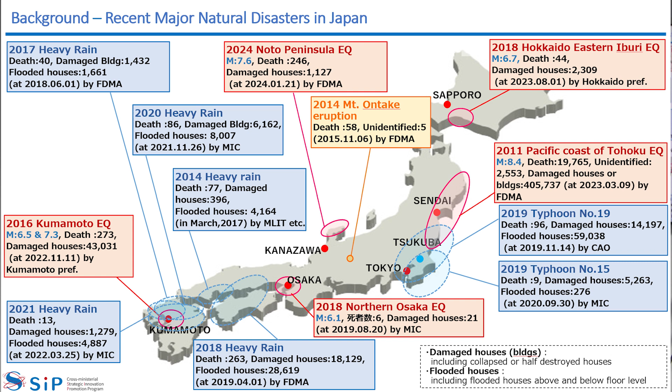As the Japanese ambassador pointed out, unfortunately we got a pretty strong earthquake in Noto Peninsula in 2024. This year, on New Year's Day, the earthquake happened, right there facing the Japan Sea. Earthquakes never care what day they come.

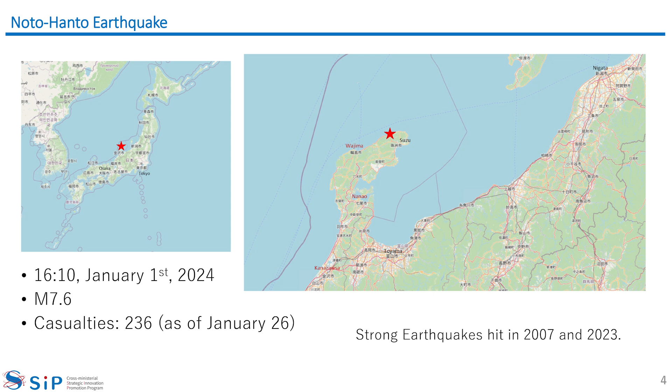The magnitude was, as the Ambassador said, 7.6. More than 200 people were killed due to the earthquake. Fortunately, nobody was killed due to tsunami. Tsunami hit the area, but people evacuated.

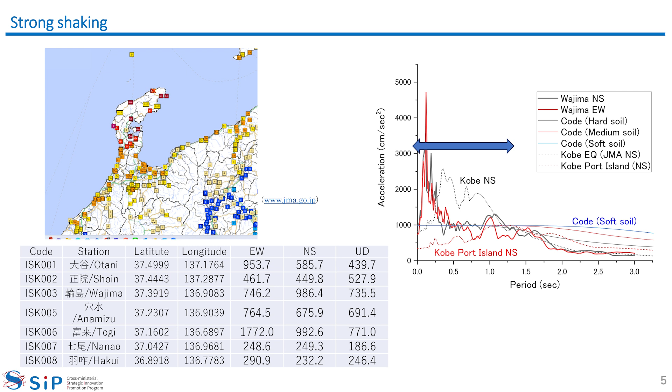Now we have a lot of sensors on the ground to measure the seismic intensity. The calculated seismic intensity hit the highest level according to the Japanese scale, which was a 7, in some cities.

The geographic characteristic is quite unique in this prefecture. You can see a very narrow peninsula. When the earthquake hit this area, we didn't have enough roads, and they were seriously damaged. We lost the way to get to the affected area.

That was quite strongly related to disaster management and also infrastructure management, how to maintain the roads to prevent this kind of catastrophic event. Many small towns were isolated because they lost the way to get out of the area.

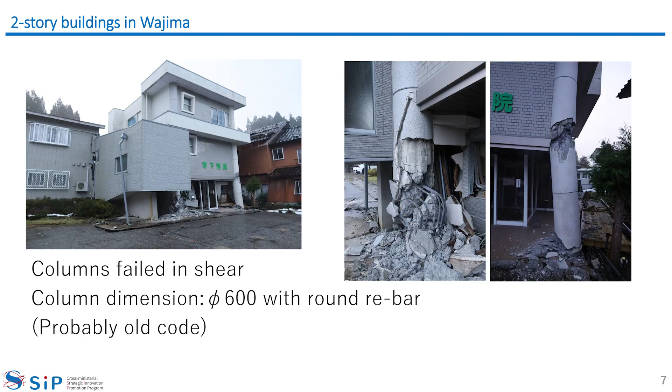For example, this one was a hospital, but unfortunately severely damaged. It looks very old because this building is using round bar, quite smooth round bar, which is not common right now. That means this building was designed according to the previous building code. According to Japanese law, the owner is recommended to evaluate the seismic capacity of a building designed under the previous code and strengthen it if needed.

But unfortunately this building was not retrofitted, that's why it collapsed. This photo is quite shocking, but this building overturned totally. Sometimes during other earthquakes, some buildings overturn like this. This is not the first case.

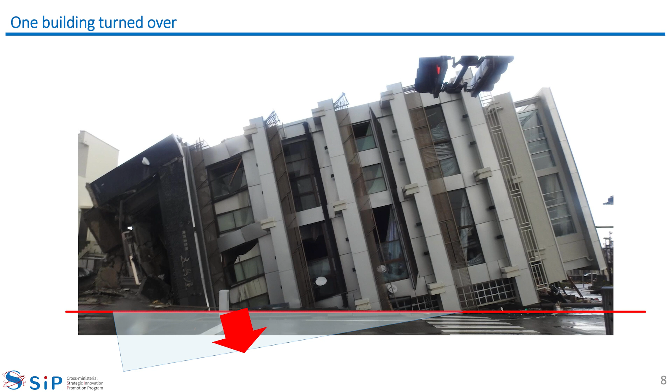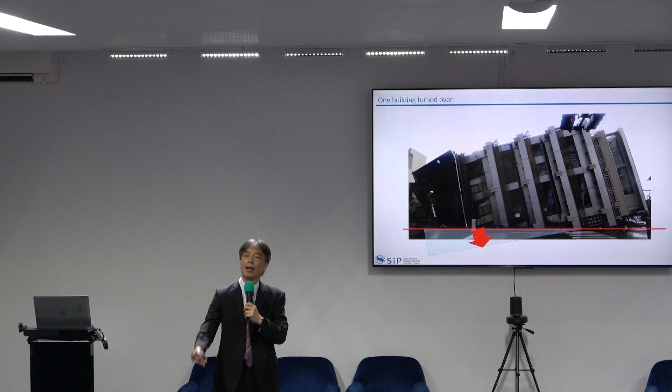But what was a first case was a 3-story timber house right here - you cannot see it, but a 3-story timber house was there. On New Year's Day in Japan, families gather to celebrate, and unfortunately that family was inside the house, which was totally crushed. The husband lost his wife and daughter there. So still in Japan, some people were killed due to the collapse of buildings.

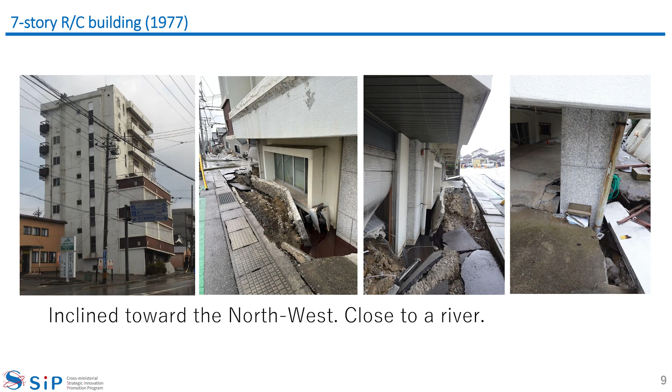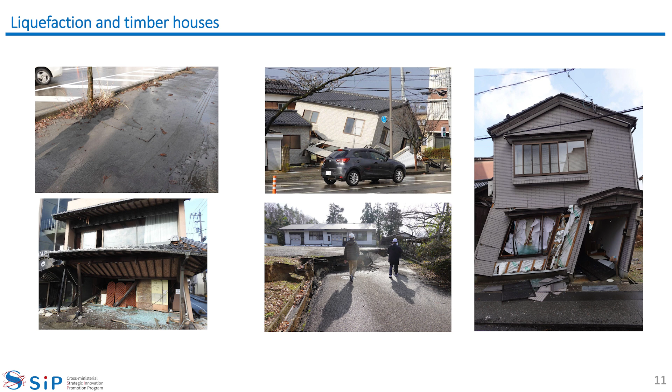And houses collapsed a lot. So we are still facing the same problem - once an earthquake hits Japan, still some people are killed due to the collapse of buildings, like this.

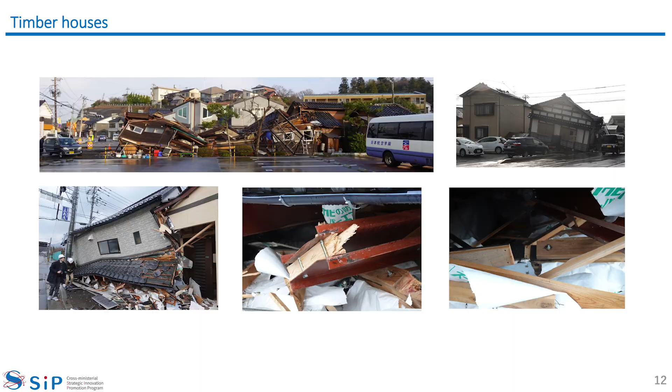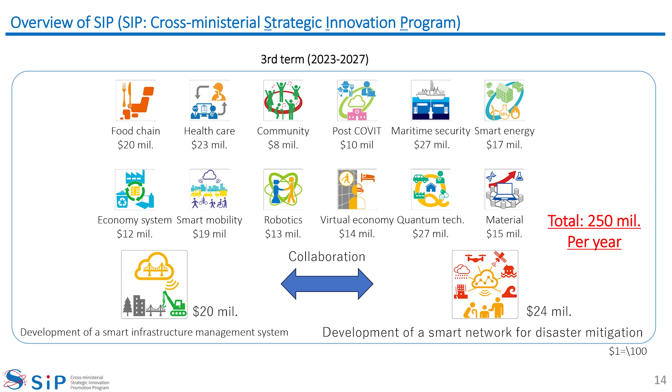Just from last year, the third term of SIP got started. Again, the Cabinet Office selected 14 subjects this time. One of them is disaster mitigation - development of a smart network for disaster mitigation is the current title. The budget size is huge, about $24 million per year for 5 years.

Today we have Professor Kisana from Tohoku University and Professor Akiyama from Waseda University, the leading universities in Japan. They are working on the development of a smart infrastructure management system. These two subjects were selected by the Cabinet Office and started last year for 5 years.

We are, of course, collaborating - like in Romania, where you collaborate between the Ministry of Construction and the Ministry of Transportation to promote seismic evaluation and retrofitting, and also to promote bridge management. As I said, this SIP project should be a multi-ministerial project.

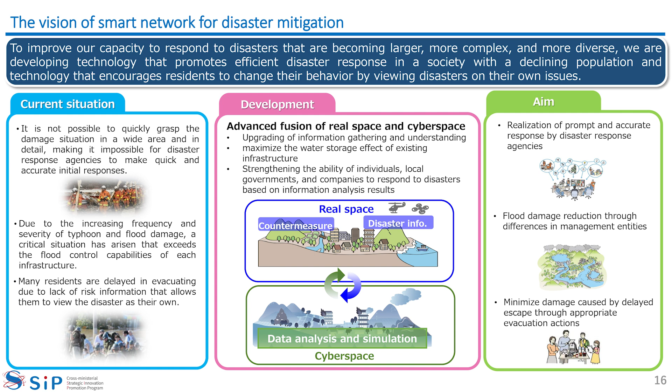Earthquake happened, then we can see the TV program, which shows overturned building. Then we recognize it's a serious situation. But it's quite difficult, where the affected, collapsed buildings were in the affected area. We cannot specify the locations of the damaged buildings, damaged people, and damaged roads and so on. But it's quite important. That's the first step to countermeasure the disasters.

Then, unfortunately, the frequency of the earthquake, typhoon, flood is increasing, most probably because of global warming, especially for the flood and the typhoon. It happened once per 5 or 6 years before, but right now, almost every year or every other year, a really strong typhoon hits Japan. Unfortunately, it should be in August or September, but right yesterday, the first typhoon was born, then heading to Japan right now. The typhoon will get to Japan the day when I will fly back to Japan. I'm pretty concerned about the situation of the typhoon right now.

On the other hand, people get used to the information about the disasters. Like me, today, typhoon is coming. Or earthquake happened and sometimes a tsunami warning is announced, and some people go to the coast side to see the tsunami. It's quite dangerous. It's quite difficult for the current central government to make the people evacuate. That's a pretty big concern right now.

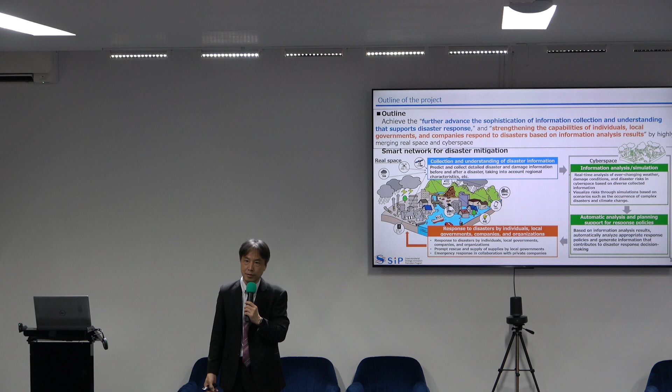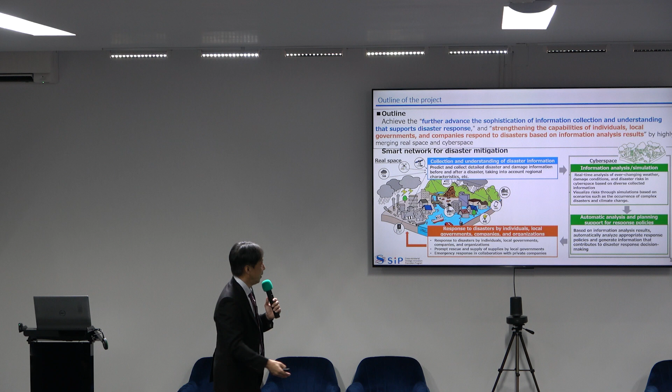But if we just give the raw data of the analysis to the decision makers, they never care. That kind of raw data cannot support the decision makers. We need to translate the raw data from the analysis for the decision makers, to support them. Then it comes back to the real world to support and take action against the disaster. The typhoon is moving second by second, and the earthquake aftershocks will come. As such, the disaster can change time by time, second by second. So this kind of cycle goes around during the very serious disaster period.

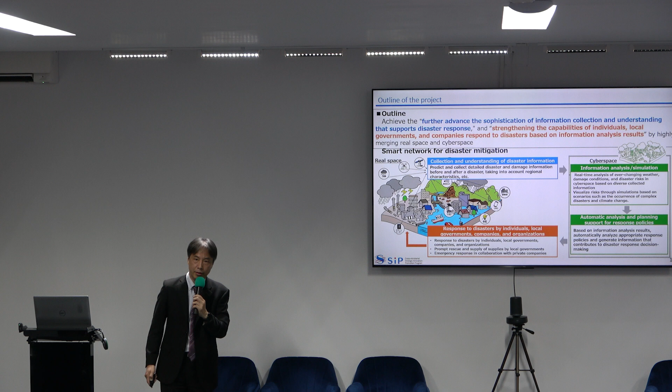This is the structure of our project. I'm sorry the letters are too small, but I hope you can have the handout of my presentation. We have 5 subtopics, subgroups from A to E.

A is a detection team. They are going to use satellite, drone, IoT sensors installed in, let's say, the microwave, light, air conditioning system. You have sensors in your home everywhere. We're going to connect such IoT sensors to the system to detect the situation.

That's subgroup A. Subgroup B is one of the very, very challenging groups, to change people's mind to evacuate. That's not only a technical issue, but also somehow a social issue. How to change people's mind to make them evacuate. That's group B.

Group C is also another quite challenging topic, to share the data among the agencies, such as the self-defense agency. It's quite similar to military, but our government never calls it military, so it's a self-defense agency, and police department, firefighter department, ambulance team, their immediate response team. Historically, it's not easy to share the information among such very important agencies. They tended to hide the information. But we are going to develop some special tools and devices and agreements among the agencies to achieve immediate data sharing.

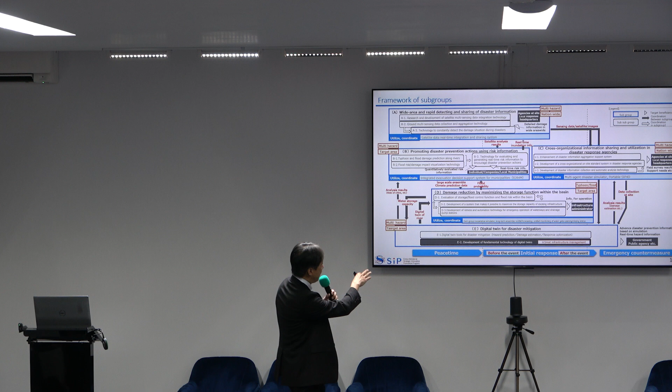This kind of digital twin, if we obtain it, can be used not only for disaster mitigation and disaster management, but also infrastructure management for daily use.

Because of that, the SIP program for disaster management and Professor Hisada's group's SIP program for infrastructure management are collaborating on this issue. So the basic digital twin will be constructed by the SIP infrastructure management team. They will develop it, and then we, the disaster management team, will develop a tool on this fundamental digital twin system.

Because the project is huge, many professors and former central officers are involved in the project. The supporting agency is NIED, National Institute for Earth Science and Disaster Mitigation. Dr. Suzuki is the program manager, and some professors are involved in managing the project for each subgroup. On the right side are the actual researchers conducting the research.

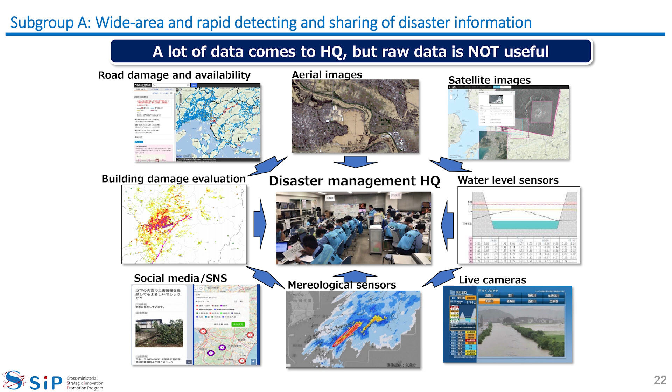This one is subgroup A. They are going to use satellite imagery and IoT sensors in buildings and rivers, and drones.

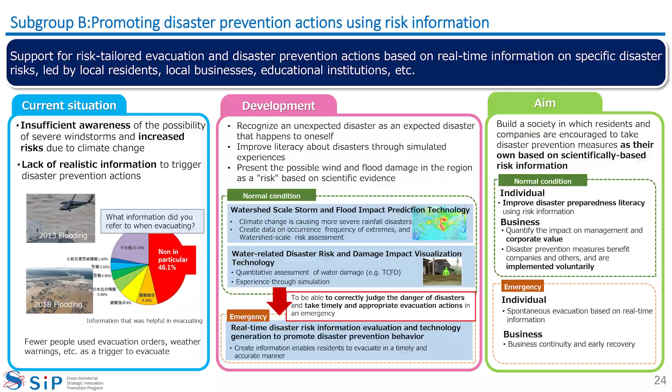Subgroup B is going to change people's minds to get them to evacuate. Subgroup C is going to develop a new device and framework to share immediate information among the self-defense agency, police department agency, and fire department agency.

That's group C. Group D is going to develop a new dam management system for both the Ministry of Construction and the Ministry of Agriculture.

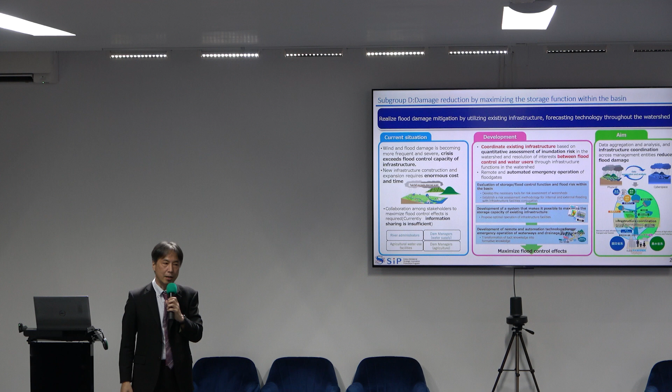Then group E, the fundamental digital twin space, will be developed by Professor Hisada's group. So we are going to develop the software to use the digital twin technique.

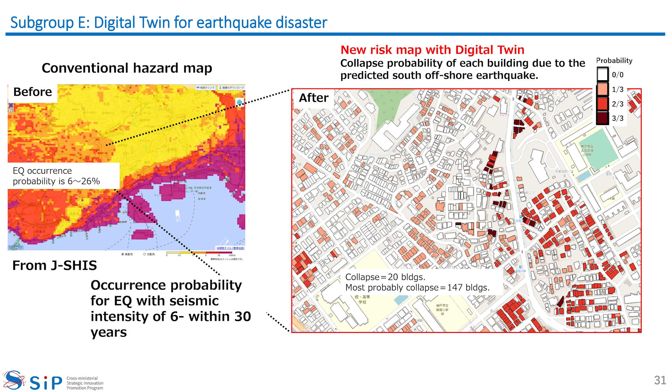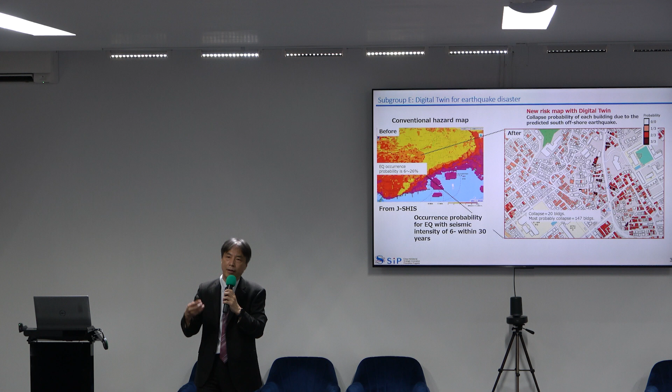So far we have two goals. One is like this, where we can estimate the damage of each individual building to give more accurate information to the people. For the people living in that specific building, you should evacuate. The next building is okay, we can stay. Something like this. Then we are going to develop some dynamic risk map right after the disaster happens.

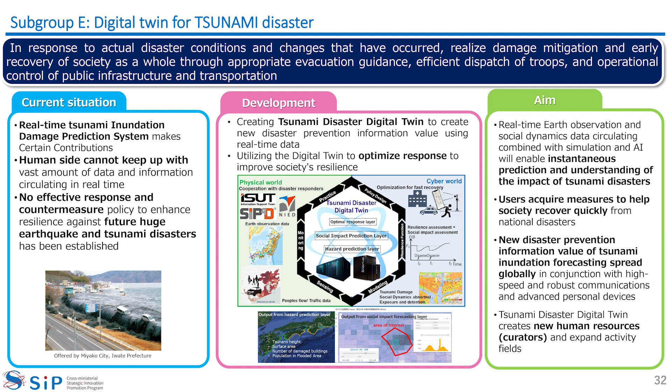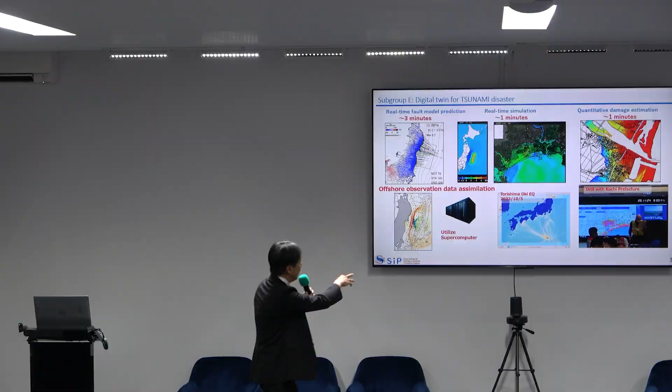The other group is for tsunami. When an earthquake happens, it's a matter of time. Immediately they start the calculation to predict the tsunami height, inundation area, and who should evacuate. They will do the calculation right after the earthquake. By using the supercomputer in Tohoku University, they say it takes just 3 minutes to predict the tsunami.

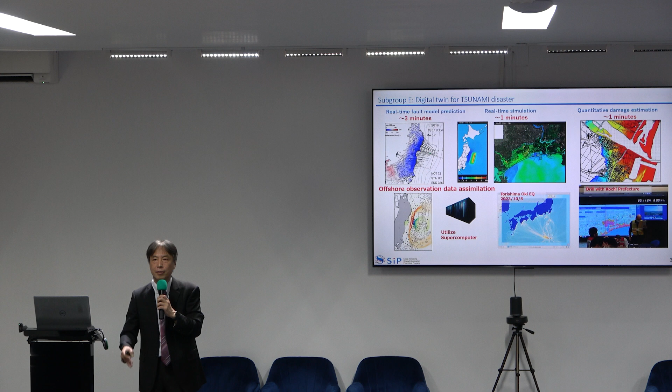Then the fault model prediction, 1 minute to the real-time tsunami simulation and so on. They are trying to develop the system so that we can finish the calculation within 5 minutes. It's quite challenging.

As I told you, we are going to collaborate with Professor Kisada's infrastructure management program to develop and share the digital twin technique and cyberspace.

So, it's almost time, I think. I would like to show you the concluding remarks. Even disaster mitigation, now it's time to use digital technique.

Before that, we didn't believe in computers, especially right after the disaster. We may lose electricity, the computer will be damaged. We cannot trust, we cannot believe in the computer right after the earthquake. But the time has changed. You still use cell phone even after the earthquake. It's getting much, much more trustable. Why don't we use the digital technique even for disaster management? The situation and the condition and time has been changed. Now it's time to use digital technique. That's what we are going to try to tackle in the near future.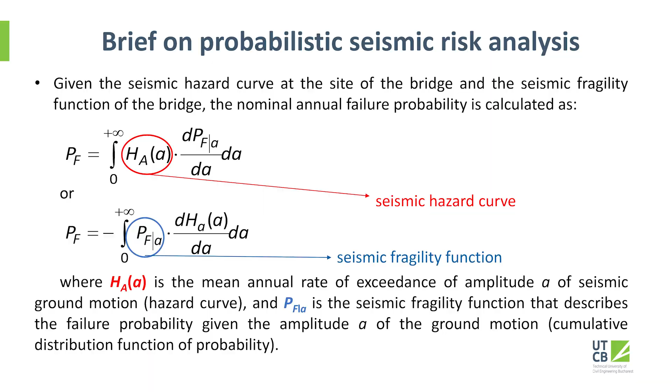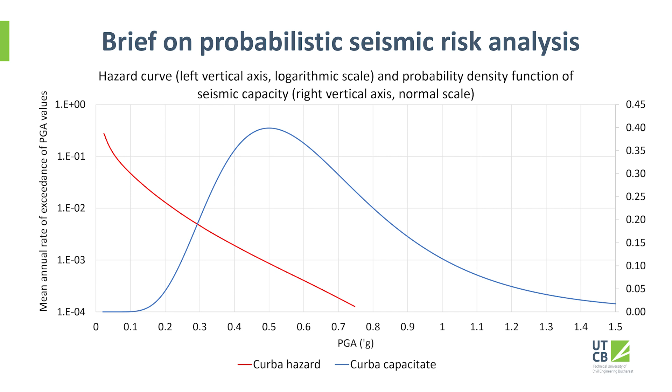I will go step by step, first about the hazard. The hazard usually is defined by a seismic hazard curve, which can be simplified as we have for the magnitude of the earthquake. We have a relation with two terms, A and B, A being the productivity of the source and B being the slope. It's the same for the seismic hazard curves: we have two parameters, K1 giving us the productivity—in other words, how many large ground motions you might have in a given frame of time—and the second parameter provides the slope. If you have a very steep slope, the probability of very large ground motions is quite low. If you have a very mild slope, the probability is quite large.

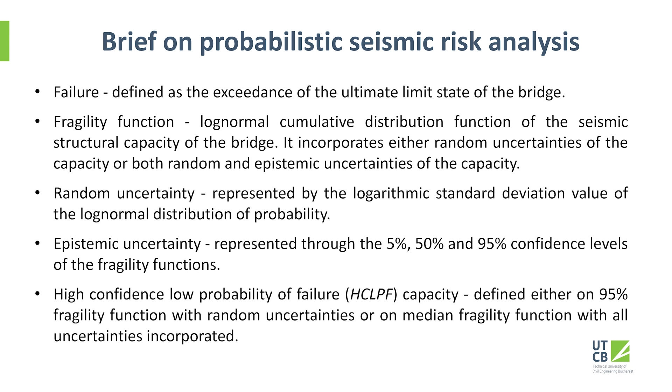For the seismic fragility, first we have to define what failure means. In this example, failure is defined as the exceedance of the ultimate limit state of the bridge. As usual, for the fragility function, we use the most advisable approach with a log normal distribution function. We take care of both random uncertainties and epistemic uncertainties, and we can define, as employed for a very long time in the nuclear industry, a high confidence, low probability of failure capacity. You may define this either as the median fragility with a 1% non-exceedance value, or on the 95% fragility curve as a 5% non-exceedance value of the capacity.

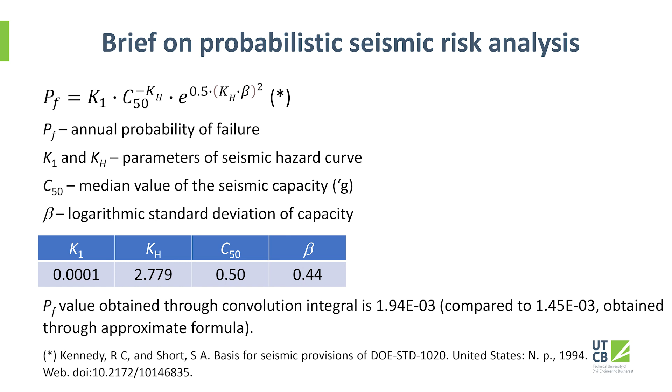In order to avoid that convolution integral, which is very tedious and requires all this information, a procedure was proposed by the nuclear industry, by Kennedy and Short, in a document from 1994, where the probability of failure can be obtained with several parameters from the hazard curve and the fragility curve—namely the two parameters of the hazard curve, K1 and KH, and the two parameters of the fragility curve, the median value and the log normal standard deviation.

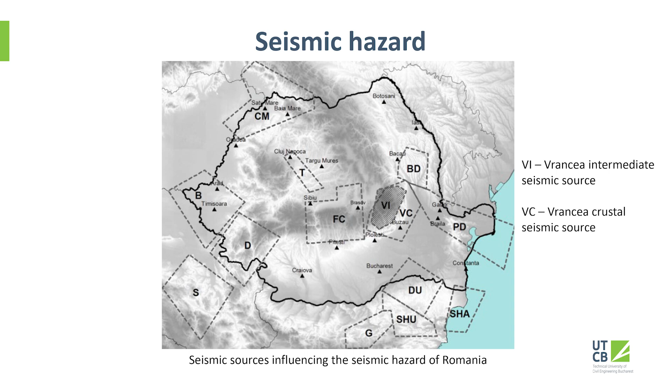As for the seismic hazard, we employed the model developed in two projects with our colleagues from the National Institute for Earth Physics and in Măgurele, Bucharest, with 14 seismic sources. But for us, what is most important is what is happening here in Vrancea. And for sure, for bridges in Vrancea and Buzău counties, the seismic hazard is dominated by the Vrancea seismic source.

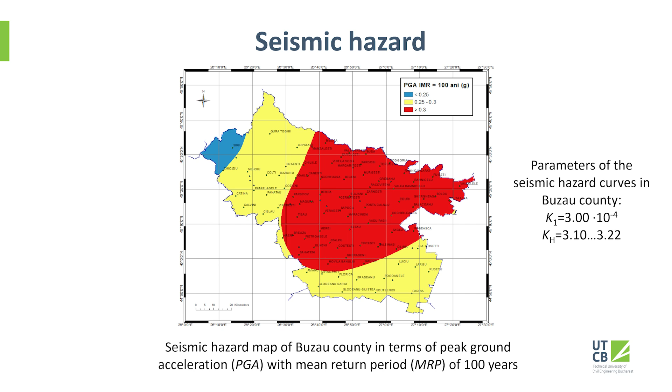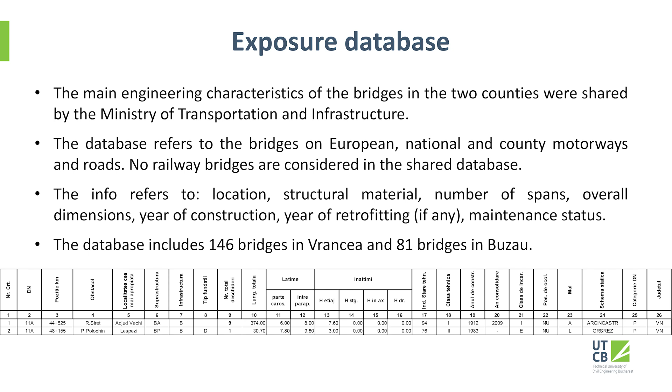As for the exposure database, the proposal from the Ministry of Transportation and Infrastructure covered two counties, Vrancea and Buzău. These are the sites of the bridges provided by the Ministry of Transport of Romania, in Vrancea County and in Buzău County. I have to mention there is no rail bridge, only road bridges in this exercise. This is the information for 146 bridges in Vrancea and 81 bridges in Buzău, which we obtained from the national company.

For each and every bridge, you have a wealth of information. What is very important to us is the location, the structural material, the number of spans, the overall dimensions, the year of construction, and the year of retrofitting, if there was retrofitting for that bridge.

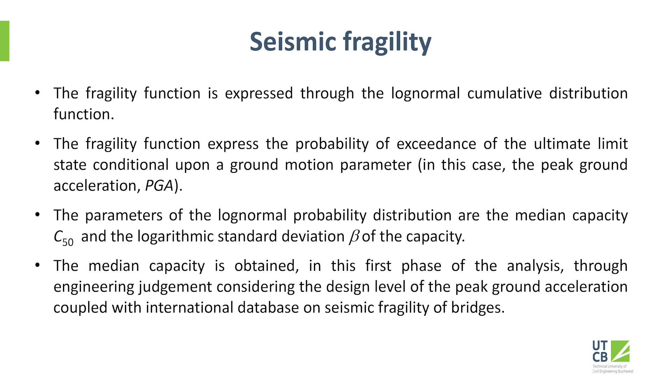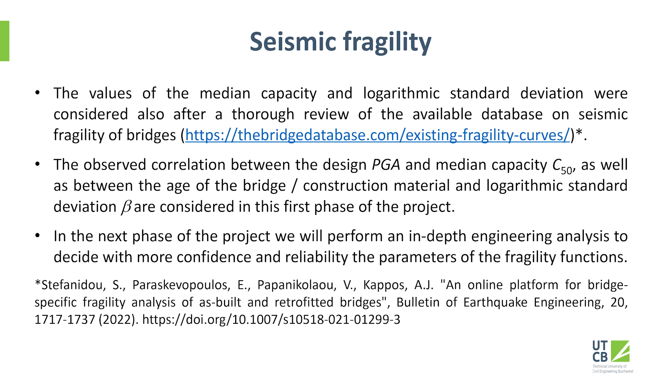As I mentioned, we will use the log normal cumulative distribution function for characterizing the seismic fragility, with two parameters: the median capacity and the standard deviation of the logarithm of the capacity.

We took into account two kinds of information. The first was about the year of construction or the year of retrofitting of the bridge, to get an idea of what technical regulations were applicable during the design. We also considered a database developed under the supervision of Professor Kappos, a very large database with many bridges around the world, called an online platform for bridge-specific fragility analysis of as-built and retrofitted bridges.

Putting together the information received from the Ministry of Transport and the information in the database, we decided on pairs of values for the median capacity and the logarithmic standard deviation, based on the different technical regulations imposing the demand for the seismic action.

For the capacity of bridges, the bridge engineers—I'm not a bridge engineer, I'm an earthquake engineer—used a regulatory framework that comes from national regulations or the Ministry of Transportation. So I refer here just to the demand, which was according to the seismic design codes from different periods in Romania. You have the design peak ground acceleration, the median capacity, and the logarithmic standard deviation.

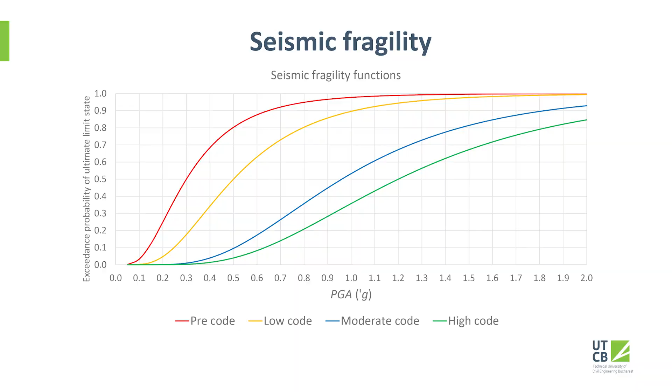Here you have fragility functions for bridges designed, for example, with a low code, shown in yellow, or bridges designed with a high code, shown in green.

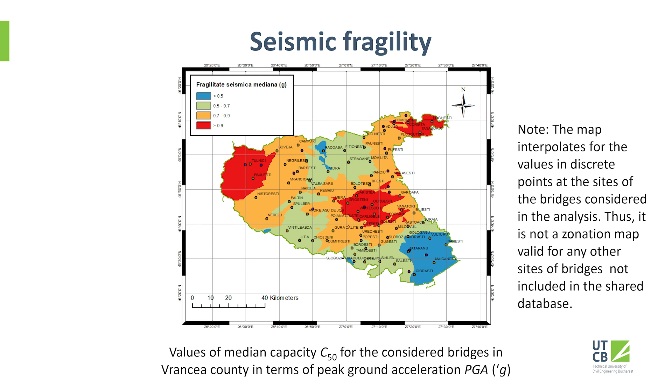Taking into account these values of median capacity for the bridges, this is the map for Vrancea at the bridge sites. I have to mention this is not a map for zonation of seismic fragility—it just interpolates the values at discrete points at the sites of the bridges considered in the analysis. And this is a map for Buzău.

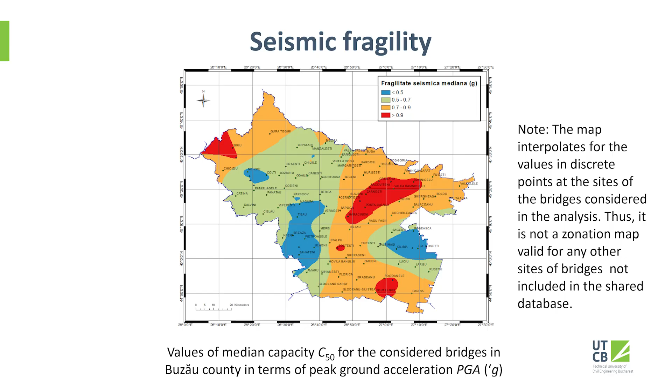Putting together all this information, and coming back to the relations provided by Kennedy and Short in 1994, this is an example of results we obtained. Of course, for all the bridges—more than 200—we have this kind of result, but this is just an excerpt from the spreadsheet, showing the city or town and the material, reinforced concrete or pre-stressed concrete.

This example shows the year of construction, year of retrofitting if there was retrofitting, and the year considered for the fragility function—for instance, if the bridge was retrofitted in 2009, we consider 2009 the appropriate year for the fragility function. Then the values K1, KH, the median value, the logarithmic standard deviation.

Probability of failure, but I have to mention this is a nominal probability of failure, as redefined in structural reliability—a probability of failure assuming perfect maintenance of the building and no human error.

So I don't trust the numbers with the nominal, but anyway you have a matrix. And if you have a matrix, then you can have some idea. That's why I normalized the probability of failure, and I have a relative probability of failure, taking into account, let's say, the safest bridge, and then how many times

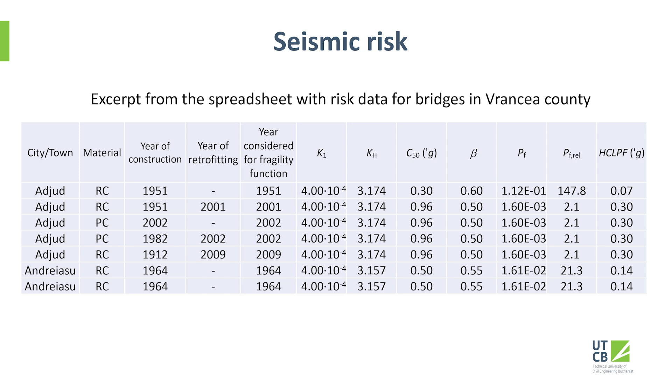Now, discussing the limits of the analysis, we have a lot of limits in this analysis, mainly in the fragility function. I think that the reliability in the seismic hazard is much better than in the fragility. Usually this is the problem in engineering, that we have more reliable information, reliable until a very big earthquake, like the Kobe earthquake, okay? But anyway, until that, the information is reliable, but with the fragility function, namely the median capacity and the logarithmic standard deviation, there is a lot of work to do.

My colleague Ionuț-Cristian will present an example very focused on a case study. And for the second phase of the project, we need more in-depth engineering analysis in order to define the values of the median capacity and logarithmic standard deviation with a higher reliability and with higher confidence.

Moreover, this analysis took into account, for the prioritization, in terms of nominal probability of failure, just the seismic risk. But of course, we have to take into account many other parameters, to correlate it with the technical state of the bridge, to correlate with the traffic importance, the redundancy, because Kusunoki-san mentioned that it was a very narrow end of the peninsula, so there are only a few roads, and this might be the case as well, to take into account the redundancy.

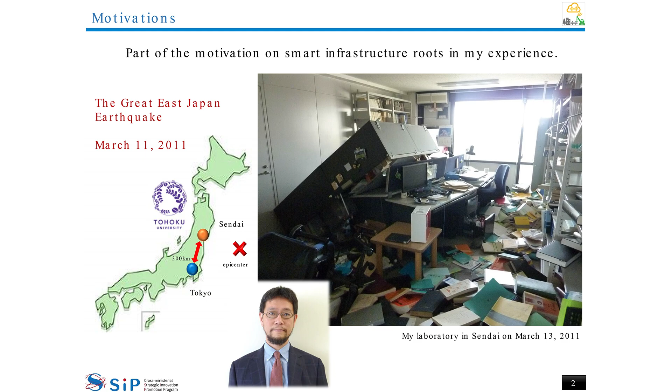My research field is concrete engineering, especially maintenance of infrastructures. And this is one of the motivations of my research project. I experienced the Great East Japan earthquake in 2011. You can see the blue is Tokyo, and Sendai is a distance from Tokyo of 300 kilometers. Tohoku University is located in Sendai, where Professor Akiyama graduated from this university. And you can see that this is my laboratory.

Just after the earthquake, and also disaster victims, I wondered how we have to maintain the infrastructures just after the earthquake disaster. At this workshop, I'd like to learn about the Romanian infrastructure management actual situation, and I would like to discuss our future collaboration. Today's presentation contains the background and purpose of the presentation, the situation and issues in infrastructure in Japan, the SIP third-term program, and concluding remarks.

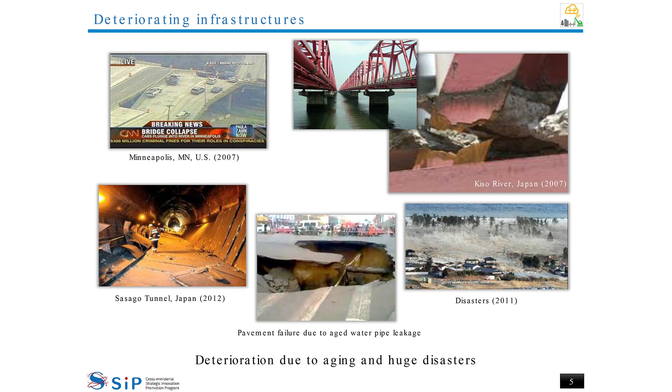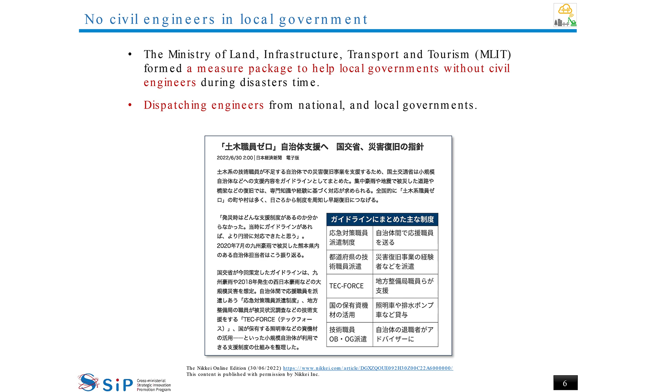Now I will move to situations and issues of Japanese infrastructures. As you can see, the deteriorating infrastructures in Japan, we are facing many risks now, such as natural huge disasters and also aging deterioration. This is from one of the Japanese newspapers, telling us there are no civil engineers in local government. So how is the Romanian situation? I would like to know.

This is one of the special issues in Japan, such as huge gaps among localities. We have almost 0.66 million bridges in Japan, and the population of Japan is 127 million. Therefore, totally, 192 Japanese people have to support one bridge. You can understand? And also there are many huge gaps among these.

When comparing regionally, the Tohoku area has a number of 134. Therefore, it's below the Japanese average.

From the viewpoint of prefecture comparison, in the Tokyo area, with such a large population, they can support one bridge per 3,300 people. However, in Shimane Prefecture, which is far from Tokyo, they have only 51 people to support one bridge.

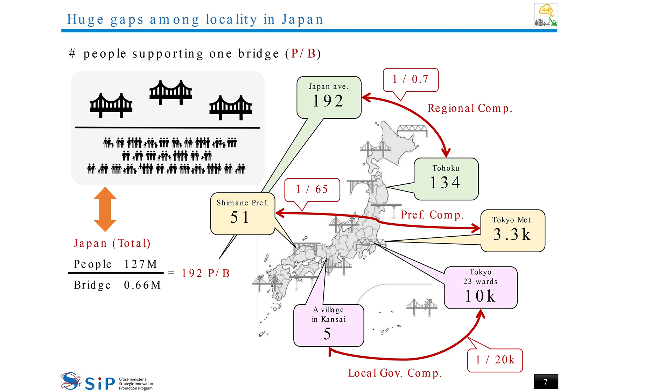This is an ultimate gap we can see. In Tokyo, there are 10,000 people for one bridge, however in local government areas they have to support one bridge with only 5 people. So the range of the gap is almost 20,000. This is one of the main issues in the Japanese situation.

And I will present about Society 5.0. This is the Technology and Innovation Basic Plan of Japan. The society that Japan is aiming for, Society 5.0, is going to realize a sustainable and resilient society that ensures the safety and security of its citizens. Society 5.0 is also a society in which the diverse well-being of each individual can be realized.

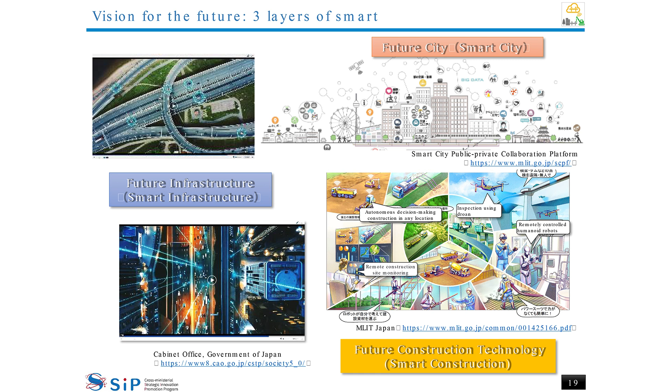This is a vision for the future. We prepare 3 layers of smart: one is future construction technology, the second is future infrastructure, meaning smart infrastructures, and the third is smart city, which contains both future technology and future infrastructures.

Project A is innovation in construction production processes, which manages from design to construction. The second is building an advanced infrastructure maintenance cycle, from construction through the maintenance term. The third is the strategic utilization of human resources for infrastructure management in local government.

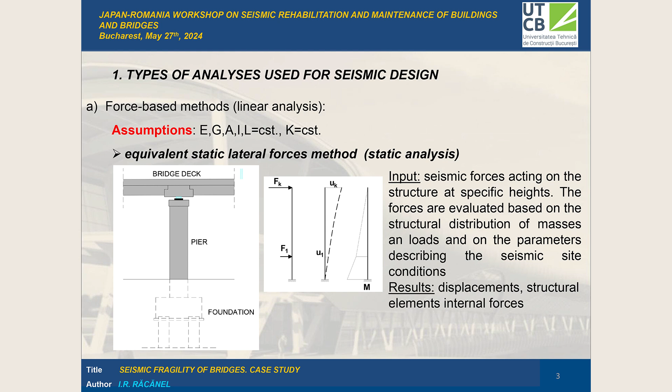Of course, in bridges, a lot of mass is distributed at the level of the superstructure, and the results were in terms of structural displacement and element internal forces.

A much more evolved method of analysis is the so-called response spectrum analysis, which is in the category of dynamic analysis. With the new issues of the Romanian code P100, even for bridges, we could take from there as input the seismic spectra.

Of course, we also have the Eurocodes, and there are a lot of provisions there. But in my opinion, the spectra in the Eurocodes are not so good for describing the seismic action in Romania. But this is another issue, and I will not address it here.

Considering the response spectra, the results are the same as for the simplified method. For a specified level of seismic hazard, we obtain the displacement, the structural displacement, and the level of stresses on the cross section of the structural elements.

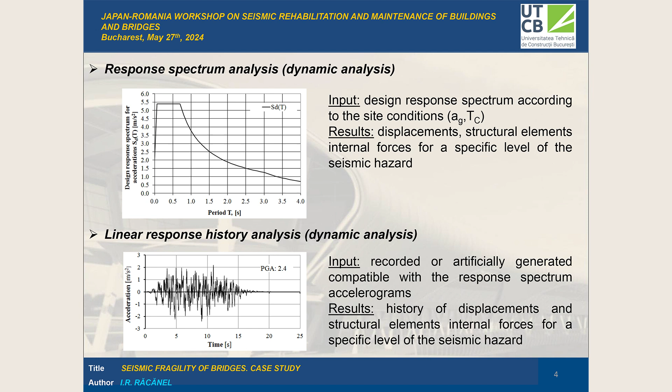Here there is a problem, because in order to perform a satisfying analysis from the results point of view, we need recorded accelerograms, but we don't have them. We have some recorded accelerograms at our disposal, but mainly we use artificially generated accelerograms.

The second major category of methods are so-called displacement-based methods. They deal mostly with nonlinear analysis, considering the evolution and degradation of the structural components through parameters characterizing the material and also the stiffness of the structure.

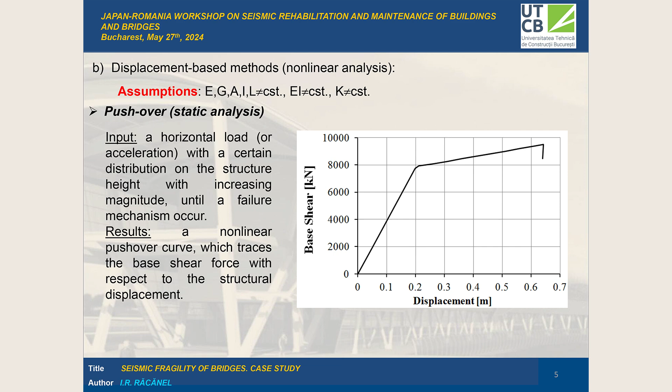Pushover analysis is one of these methods, and the method practically starts with considering some lateral forces and increasing them until some weak points appear on the structure. The results are mainly a representation between the base shear and the structural displacement.

A much more evolved method proposed in the literature is the so-called capacity spectrum method. A version of this method was first introduced by Freeman around the 70s, and it's combined with pushover analysis. The idea is to plot the spectra for a specific site in a special format, acceleration displacement, ADRS format. The pushover curve should also be translated into the same format, and by using both curves, at the intersection between the pushover curve and the curve defining the spectra, we can find the so-called performance point of the bridge in terms of seismic resistance.

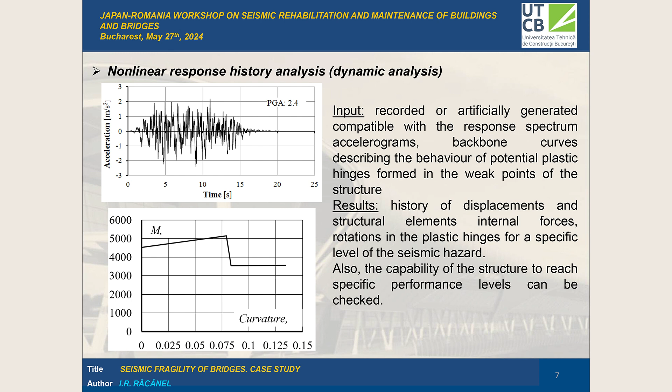Of course, there is also nonlinear time history analysis. The difference between the linear one and the nonlinear one is that the input is almost the same, but besides the inputs in terms of accelerations, we use also some other inputs describing the nonlinear behavior of the materials and characteristics of the cross-section of the structural elements. Here the response is much more evolved, so we can find out the evolution in time of some needed parameters, displacements or internal forces, but also the behavior of the structure in the weak points that can appear during the earthquake action.

This analysis can be used also to estimate the performance level of a structure in terms of displacements or forces.

Today I will present a study, as I told you before, but this study deals with the determination of fragility curves for a bridge in Romania. The analysis is based on the concept of incremental dynamic analysis. In fact, this analysis is based on the nonlinear time history analysis, using as input some artificially generated accelerograms, which were scaled to comply with different levels of the seismic hazard.

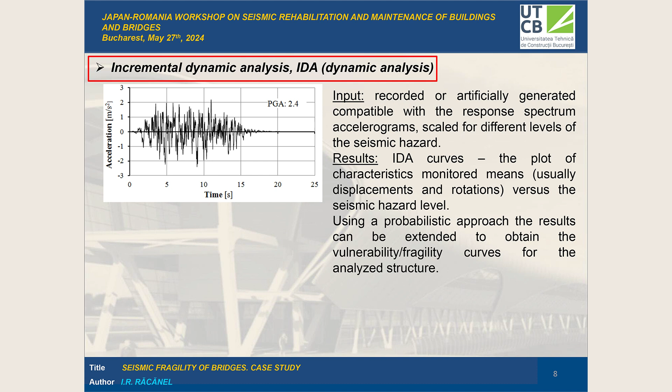Then, by interpreting the IDA curves by the meaning of some limit criteria we imposed for this particular bridge, we can estimate the behavior of the bridge not only for the base earthquake, for which the bridge was designed several years ago, but also we can have a prediction of how the bridge will behave for other levels of the seismic hazard.

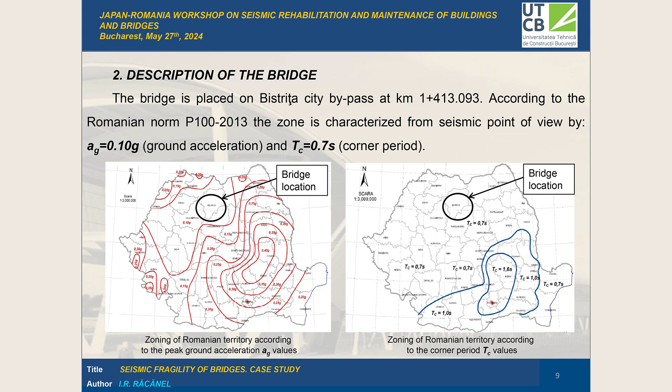The bridge is placed in Bistrița County, Romania, and you can see here the characteristics of the site: peak ground acceleration 0.1 G and 0.7 seconds corner period.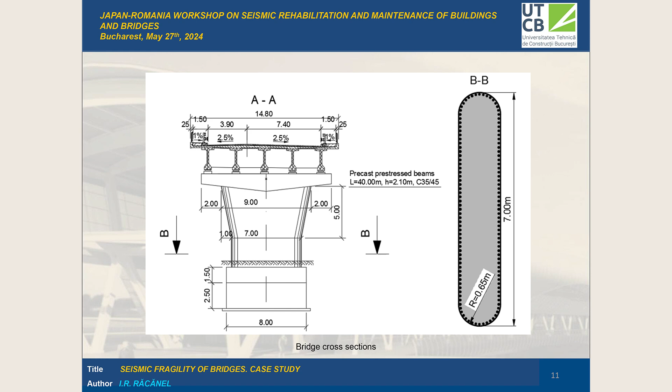This is a current cross section of the bridge. You can see the pier geometry, the elevation of the pier, its foundation, and the superstructure, which consists of 5 precast concrete girders having at the top part a concrete slab. It's a road bridge.

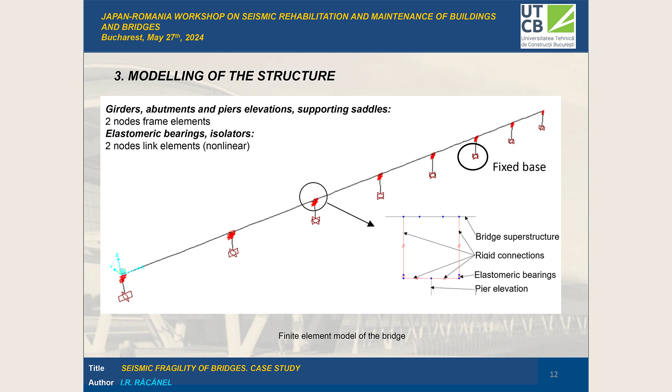The finite element model of the bridge is not so complicated because we were not interested in what is happening at the superstructure level, so all characteristics of the superstructure were grouped into a single line. You can also see a detail of how we have modeled...

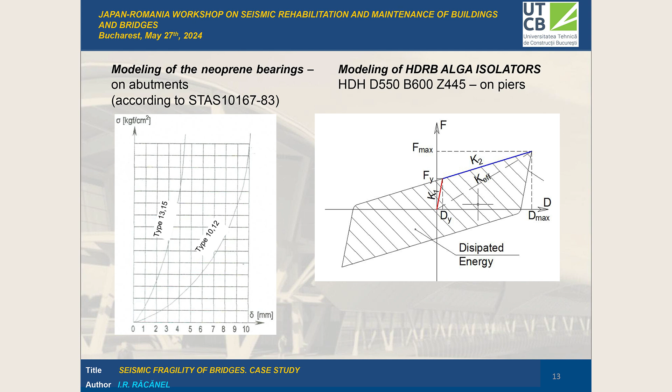...the elastomeric bearings and also the isolators, because the bridge has 2 different kinds of bearings. On the abutments, they are classic neoprene bearings with very low height, and on the piers there are some kind of bearings similar to high damping isolators, high damping rubber bearings. These are the curves describing the behavior of the used bearings and isolators.

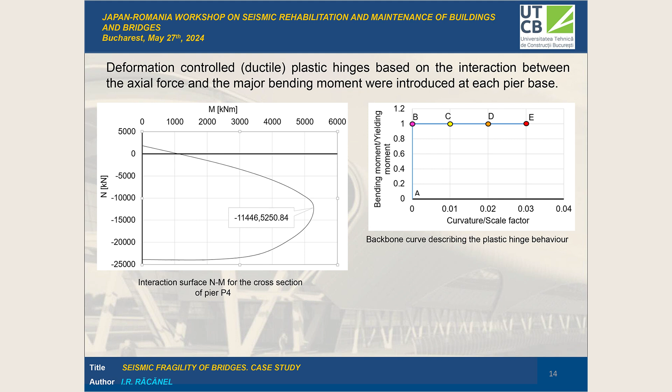Here are the characteristics introduced for the plastic hinges considered at the base of the piers. In the second graph, B, C, D, E are not the performance levels usually input in some kind of software; A, B, C, D, E are only the points we find in the backbone curve. So the points characterizing the performance levels should be between B-C and C-D respectively.

The plastic hinges were deformation controlled, based on the interaction between the axial force and bending moment, because the cross section of the pier is massive, so it develops also an important component of bending moment in the longitudinal direction.

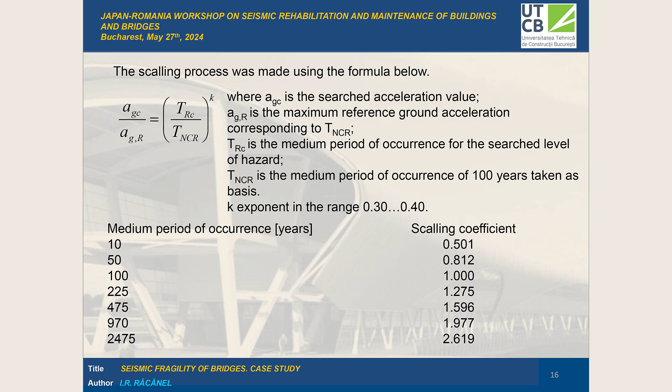Each accelerogram was scaled in order to comply with several levels of the seismic hazard. We have considered as reference a period of occurrence of 100 years, because the bridge was designed considering this level of seismic hazard. So we want to see what is happening for other levels starting from this one. You can see the scaling coefficients; we use here this exponent k of 0.3.

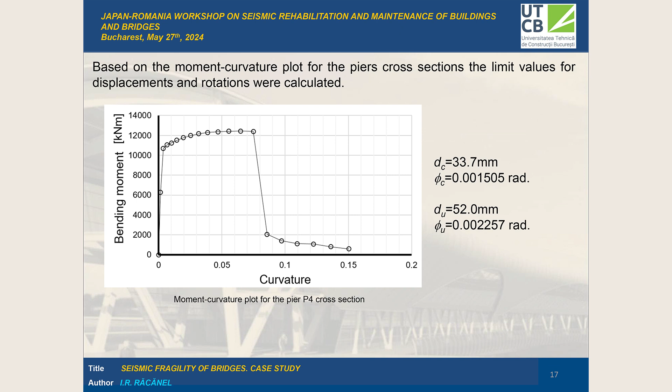This is the moment curvature plot for the cross section of one of the piers. By the end of this, we have established the yield displacement - referring to the reinforcement - and also the ultimate displacement. As you can see, the estimated values are shown there on the right for the rotations and for the displacements.

By performing a lot of nonlinear time history analysis, we can establish the so-called IDA curves, which are representations of the response parameters - in this case displacements at the top of the piers, and the rotations in the plastic hinges at the base of the pier. We limited and searched the displacements at the top of the piers because we're interested to see if the expansion joints can accommodate the displacement produced by the earthquake at different levels of the seismic hazard.

So the representation is of displacements and rotations versus the level of the seismic hazard. You can see the limits there for the displacements and rotations for yielding of the reinforcement and ultimate displacement.

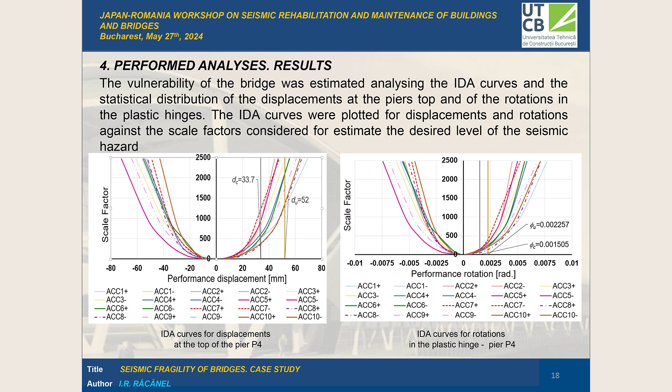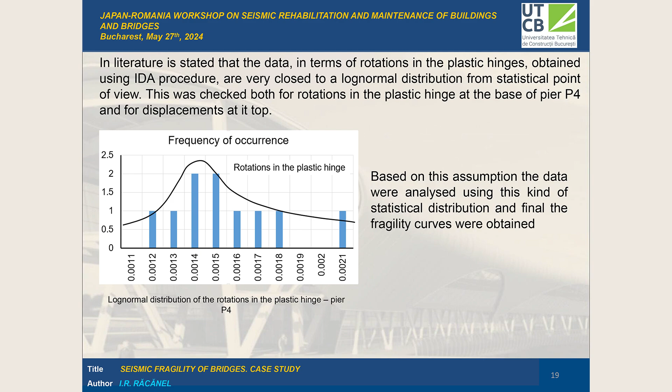Further on, we use these values of displacements and rotations by the end of a probabilistic analysis, taking into account the suggestion in the literature that all these values for displacements and rotation respect a log normal distribution. We checked this, and it is almost quite this. So starting from this assumption, we trace the fragility curves for this bridge.

In the first stage, we determine the probability density functions for each level of the seismic hazard, and then the cumulative distribution functions. Interpreting the limit values we imposed in terms of displacements and rotation, we could establish the probability of non-exceedance for each level of the seismic hazard.

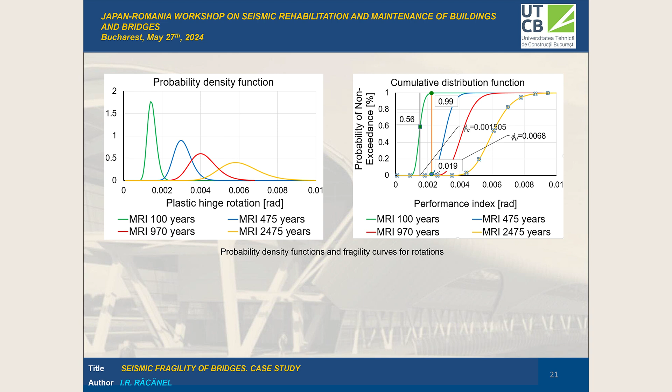Here are represented only 4 levels of the seismic hazard, as you see: the base earthquake with a period of occurrence of 100 years, and then 475 years, 970 and 2,475 years. These graphs are for displacements, and the corresponding graphs are for rotation in the plastic hinges at the base of the piers.

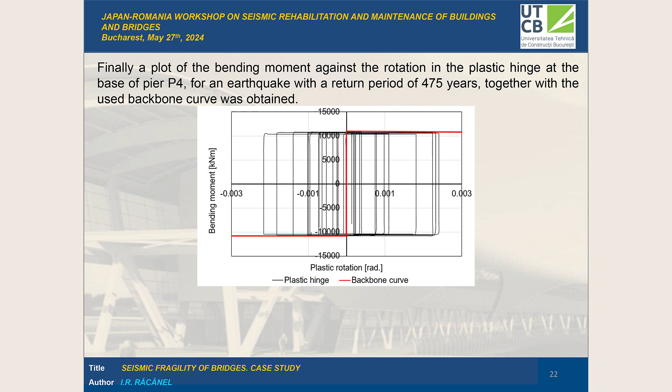I also choose to show you a plot of rotation in a plastic hinge for the tallest pier. This corresponds to an earthquake with a return period of 475 years. As you see, the limit rotation we imposed, 2 promille, was exceeded even for this earthquake.

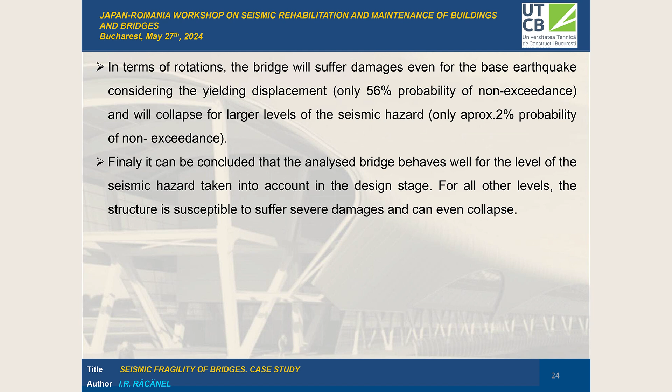So as a conclusion, as we expected - because the bridge was designed taking into account the old norms in Romania - the bridge will suffer some damages starting with an earthquake with a return period of 475 years. So we should enlarge this kind of analysis for other bridges in Romania, main bridges or also secondary bridges existing on the Romanian infrastructure network. Thank you very much for your attention.